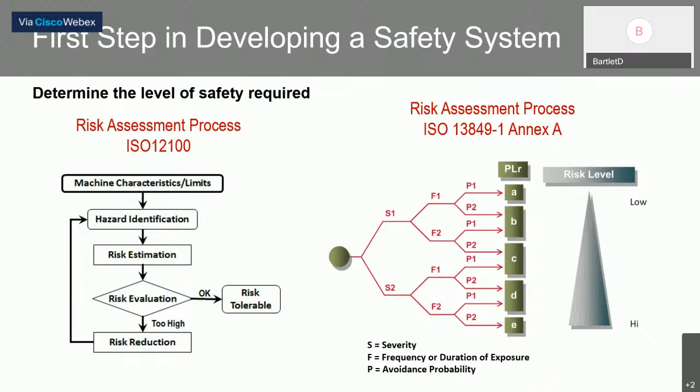In going through a safety project, Rockwell has an excellent resource called the SafeBook 5. It's available from Rockwell's website on the literature library download site. And it goes through everything from risk assessments, standards, system design, and so forth. It's an excellent resource. So if you don't already know about that and looked at it, I encourage you to do that.

All right, CIP Safety. Number one, what is CIP Safety? The main point I want to make here is CIP Safety is not a Rockwell Automation standard. A lot of people think it is. It's actually an ODVA standard. It's based on the ODVA standard of Common Industrial Protocol, or CIP. And it really just adds functional safety for EtherNet/IP and DeviceNet networks.

The standard covers how devices communicate to each other, from I/O to light curtains, safety PLCs, and so forth. An important point is it allows for the mixture of safe and regular devices on the same network, which I think is a real advantage in CIP Safety. And another important point, safety is handled in the end devices. So that really allows network media independence.

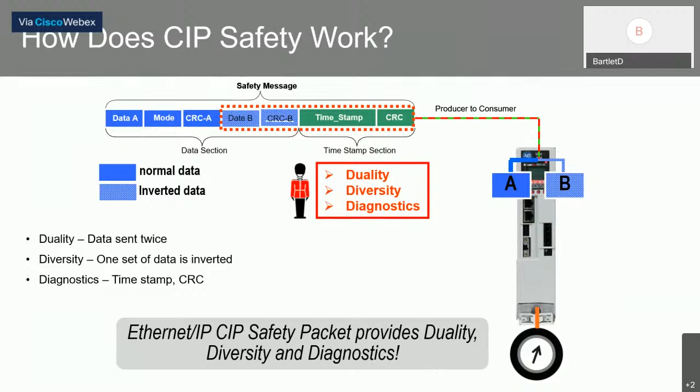Now, as we send this message, see the animation here. We'll send the packet to the drive. The drive also has to have duality, diversity, and diagnostics. So you can see here, there'll be two safety processors in the drive, which gives us duality, and one will get the normal data and one will get the inverted data. So that gives us the diversity. Of course, the drive as well has diagnostics as far as timestamp and CRC.

So in the drive, each processor looks at its data, the normal data or inverted data, and makes a decision whether safe torque off, if that's what we're dealing with, is enabled or not. If the two processors in the drive agree, then it executes the command. In this case, it will be executing a safe torque off and stopping the motor. If there's any discrepancy in the two processors or processes in the drive, of course, it would go to the fail-safe condition, as well as if there's any interruption in the network.

Again, the safety is in the end devices, so the safety processor in the drive would establish a connection. If that connection is interrupted or takes too long to communicate, the system is going to go to a fail-safe or off condition in this case.

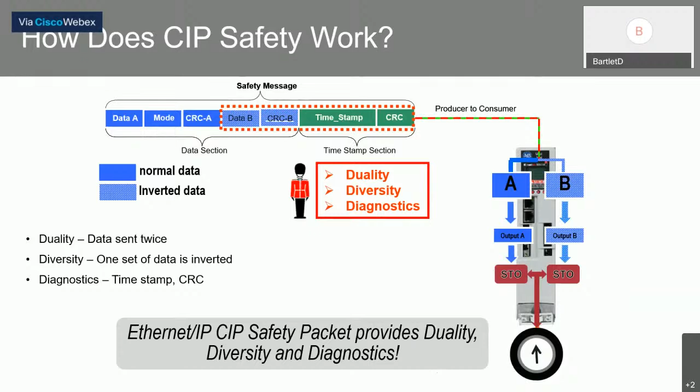All right, what are the advantages of CIP Safety? To me, the biggest advantage of CIP Safety is that we can a lot of times achieve higher levels of safety that are just not available or difficult to implement in hardwired solutions, or even other network solutions. A lot of times we can get up to a SIL 3, PLe level. And again, sometimes we can't do that with other systems. A lot of drives, we can only get to a PLd or category 3 level through safe torque off boards and so forth. This is something that allows us to extend that.

Of course, it's obvious we get a reduction in wiring. Also, for those of you that have to validate your code, we can develop code that we have validated and reuse that code, so we don't have to go through that validation process a lot.

Certainly, this puts everything into Studio 5000. We're doing motion control within that. We're doing regular machine automation with that. Now we can do safety within that. So we don't have to have separate programming software and separate processors to do everything. We've got some modularity in terms of design and safety zoning. And it's a lot easier to do troubleshooting. We don't have to run extra contacts back to I/O modules to see which devices are triggered and so forth.

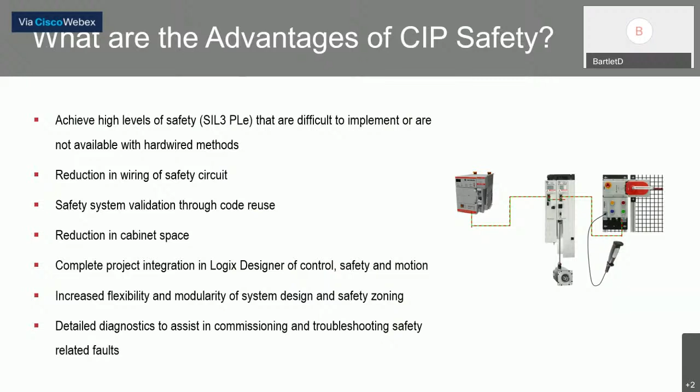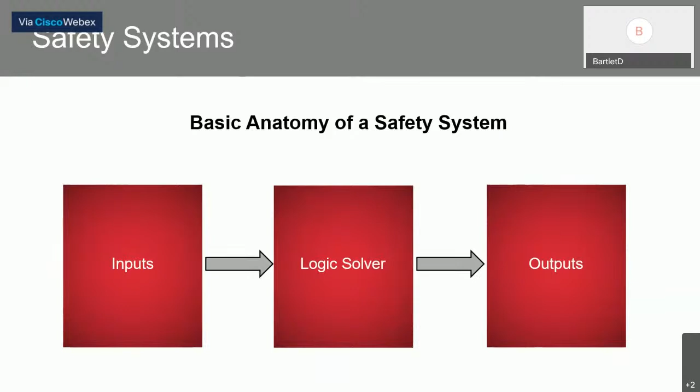So there are a lot of advantages here. Okay, in terms of the products that we offer and the systems that we have, this presentation, we're basically going to do that in 3 parts here. With any safety system or with any automation system, obviously you have a logic solver that takes inputs and then writes to outputs. So that's the order in which we're going to present information that we have today.

So we'll begin with input devices. Now, one thing I want to mention is this is not an exhaustive list of all Rockwell safety input and output devices. We have chosen to specialize in EtherNet/IP devices where you can get information into and out of your safety tasks directly. So certainly these are not the only safety devices that we have.

The first input device that we want to present to you is the multifunctional access box. We refer to it as MABE for short. It's basically a gate switch. It's for allowing full body access to a system. You can see on there, it's a gate switch, it's a handle, it's a locking mechanism. We do have integrated e-stop, as you can see. The controls in terms of push buttons and pilot lights and so forth are configurable. We have many different options for you.

We have the option of connecting an enabling switch directly into that. It is powered by 24 volts, and of course we have dual port Ethernet. The thing we like to say about this device is basically you take 24 volts and an Ethernet cable to it and you're ready to go. You got a complete safety system.

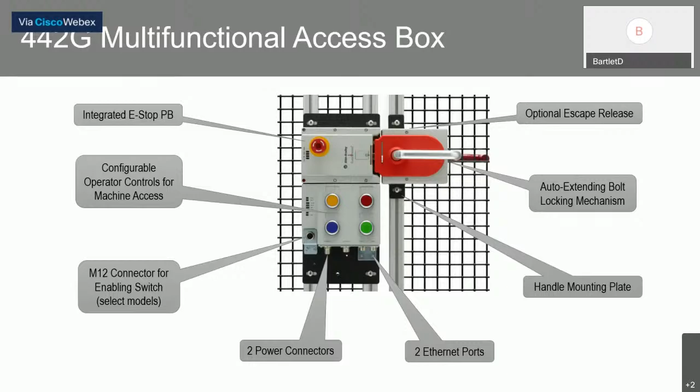All right, some more bullets about the MABE. High holding force, misalignment tolerances. It does have the escape release. It is rated for up to PLe category 4. So very, very high rating, as high as you can get in terms of safety on this. As I mentioned, we have our choice of controls. We can configure the different status lights and push buttons on it. We do have left or right hand opening, sliding or hinged doors.

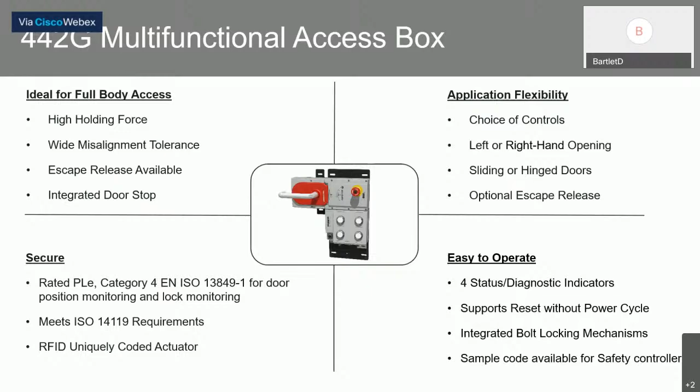And another big thing is Rockwell has sample code available for this MABE. You can go to the Rockwell website, sample code site, download the code and put it directly into your Logix processor. It's pretty quick and effective.

A relatively new device that we have in terms of the safety inputs is our CIP Safety encoder. This has, I think, only been out a few months now. It does allow you to take advantage of drive safety functions within Studio 5000. It is SIL3 PLe capable. Of course, it is Ethernet ready, just like the MABE. You take 24 volts and an Ethernet cable to it and it's ready. And the encoder data is available directly into the safety task.

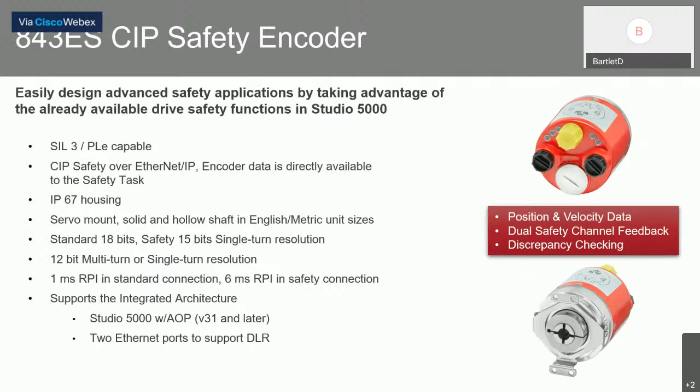You can see on the right some of the information we can get into the safety task: position and velocity data. We got dual channel feedback and discrepancy checking. So as you'll see later, we have safety functions embedded in some of our drive products and the feedback within those drives. This is a way to add that safety feedback on something that does not offer that feature.

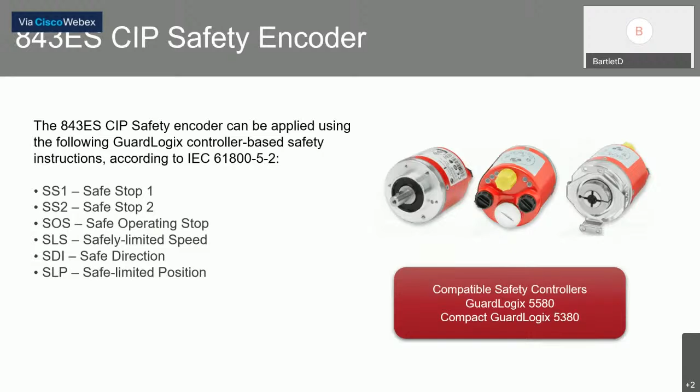And I just wanted to mention here, this is something that Gary will talk about a little later. The CIP Safety encoder allows you to get information back into the PLC for the safe speed and safe stop instructions in the PLC. Of course, all the safe limited speed and safe stop instructions are something that are in our L8 controllers, our GuardLogix 5580 and Compact GuardLogix 5380.

All right, next input device is our 450L light curtains. I do want to mention that this product hasn't quite been released. We do expect it at least by the end of this year. It is a product that's very close at this point. And really, as far as I know, the only safety light curtain that will go on EtherNet/IP. It is capable of SIL3 PLe.

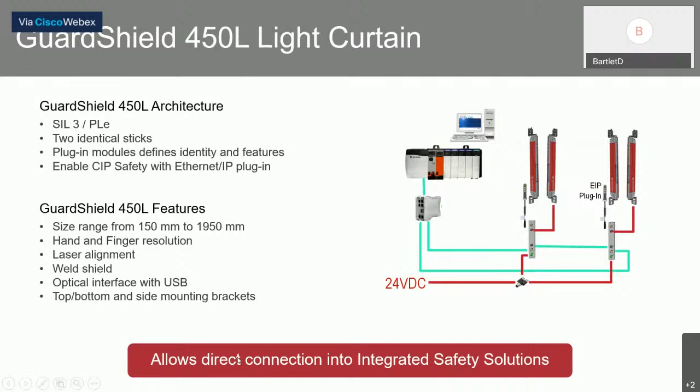The cool thing about this light curtain is we have two identical sticks, and the plug-in modules define the identity and features of the module. So as you can see from the graphic there, we'd simply choose an EtherNet/IP plug-in. I won't read it to you, but you see some of the features, size ranges, and so forth of the light curtain there. Laser alignment, hand and finger resolution, and so forth. And again, this is going to connect directly into our safety task and provide the information.

A little bit closer look at the light curtain. We have an EtherNet/IP plug-in module that's going to go into the light curtain. And then we have a block that I can plug at least as many as 2 light curtains into. So it's a completely modular system.

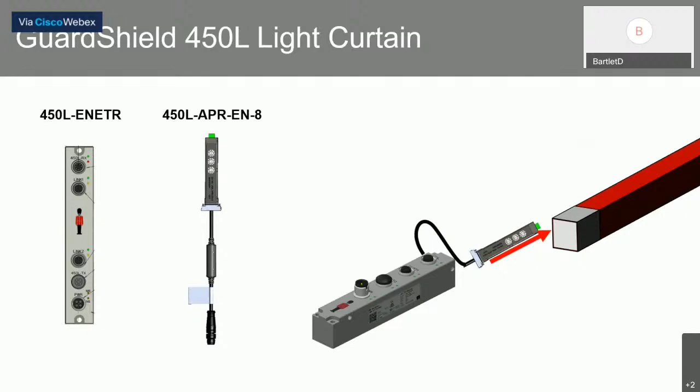Our last input device is the SafeZone 3 CIP Safety laser scanner. This is kind of a look into the future because this device does not have a release date yet, but it is something that's coming, and we wanted to make you aware of it. At this point, this will be up to a PLd capable. It will integrate directly into the safety task.

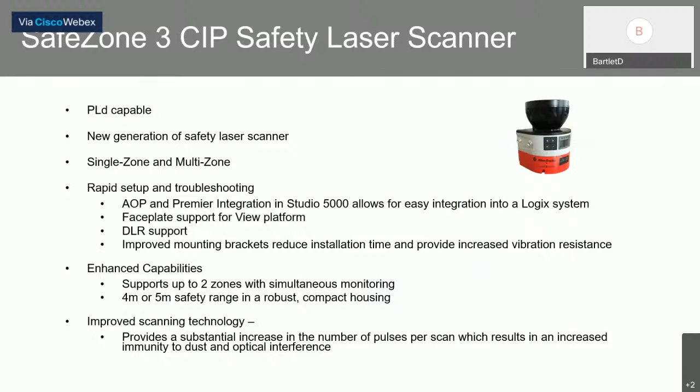We have the AOP and premier integration into Logix. So like any other EtherNet/IP device, when you add it to the I/O configuration tree, all your tags and everything are immediately created for you. So that's all of our newer CIP Safety EtherNet/IP devices. We'll go into the logic solvers, the controllers, right now. Probably most of you watching this are already familiar with most of our PLCs, so I don't know that this will be anything new.

So if we begin with our Compact GuardLogix processors, our 5370 and our 5380, also known as the L7 and L8 controllers. The GuardLogix 5370 has been out for a little while. Of course, it supports motion and safety as well, up to 16 axes. It is a SIL 3 PLe controller only. And when you purchase the safety controller, you also have to purchase the motion as well. And of course, it has 100 meg Ethernet embedded.

The 5380. Most of you are probably familiar with the differences in regular 5370s and 5380s. You certainly can do motion on this, a higher axis count with the 5380. We do have a gig port in terms of Ethernet, so that's exciting. Cool thing about the 5380 is with the dual port Ethernet, they can be the same IP address, or you can split the IP addresses apart and have two different subnets.

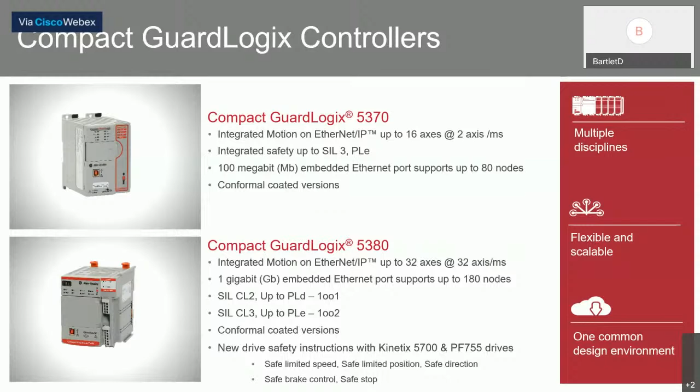All right, going on to the GuardLogix controller, kind of the same story. We had 5570s and 5580s. All of you know that with the 5570, we can go to a safety processor, but we always have to include the safety partner, and that's rated to a SIL 3 PLe version. Like the Compact GuardLogix, when we go to the GuardLogix 5580, if we only need a PLd, we can just have the safety processor by itself, or we can change that to a PLe application by adding the safety partner.

And in terms of Studio 5000, it's really just a checkbox to go back and forth between them. So if you had a PLd and you wanted to make it a PLe, you can go into a checkbox in your program, add the safety partner, and now you have a PLe application. And of course, the other things that come with the L8 processors: the safe limited speed and safe stop instructions, as well as the gigabit Ethernet.

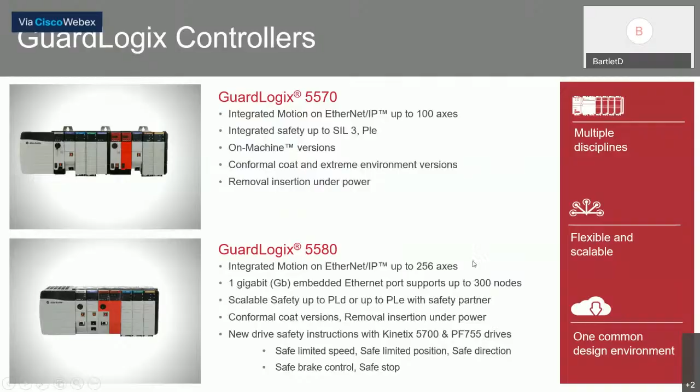All right, a little bit of CIP Safety I/O. This is debatable whether this is an EtherNet/IP product. All the distributed I/O can go on EtherNet/IP, so I just put something quickly in here. Just wanted to make sure that you are aware of some of our newer safety I/O products. We have the POINT Guard safety I/O, which has been our bread and butter for a number of years now, and still is. We have the ArmorBlock safety I/O, which we've had for a while. But in the last year, Rockwell has added some other I/O platforms.

Number one, we have 1756 I/O that can be in the local chassis of a processor now. It also can be in a remote chassis if you have a 1756 remote chassis. We have Compact safety I/O now. Similarly, it can be local I/O for a 5380 controller, or if I put an Ethernet adapter here, this can be distributed I/O. I jump down to the FLEX 5000 I/O, same thing there. We have several safety modules in that now. Of course, FLEX 5000 is always a distributed I/O.

One thing to mention about the Flex 5000 as well as the Compact 5000 is they are a gigabit Ethernet platform. So if I put Ethernet adapters in here, that has to be connected to, say, a 5580 or 5380 processor that has a gigabit port.

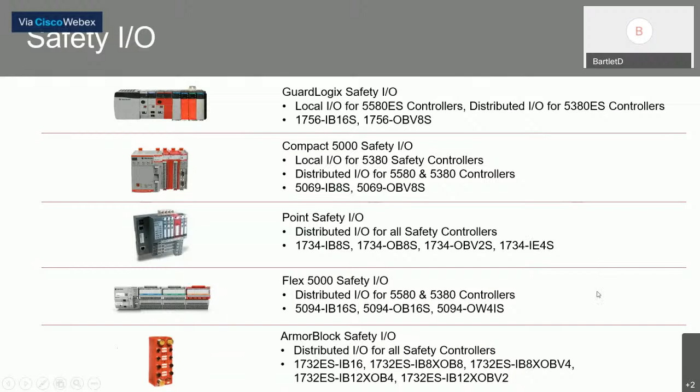Whereas, on the 100 meg scale, we still have the Point Safety IO here. And you can see some of the things we have. Typically, we have an input-output module for each of these. Some of these we have bipolar relays. There is one exception where we have an analog input or pulse input in the Point IO. So different things there.

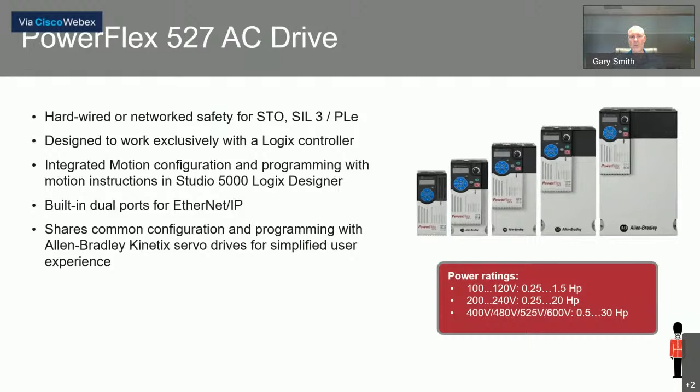Hi, Gary. I think we might have lost you. It looks like you're muted. How's that? That's much better. All right, sorry about that.

No problem. So I was stating that the 755 and 755T are by far our most flexible product line, either in the drive or motion platform. We are able to run permanent magnet or induction motors. The 755 can operate in a standalone mode, or it can reside on multiple different communication networks, and it can also operate very similarly to our Kinetix motion products as well. It's available from fractional up to 6,000 horsepower in a low voltage platform.

From the safety perspective, though, the 755 supports multiple different safety cards, and these cards allow you to achieve different safety functions. So you can achieve hardwired or network safe torque off, all the way up to and including advanced safety features that Donnie had hinted at earlier. And these include safe stops, safe limited speed, safe position, etc. And you can achieve up to performance level E depending on the required function.

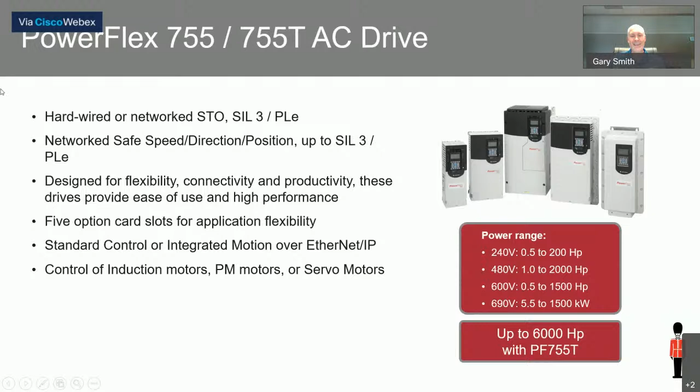The Kinetix 5500 is a Kinetix servo product. It can operate as a standalone drive or a multi-axis drive. And in multi-axis mode, we utilize a shared common AC and/or DC bus configuration. The 5500 is available up to 15 kilowatts and can operate our newer single cable VPx motor design. There are two separate versions of the Kinetix 5500. One version is dedicated to hardwired safe torque off. The other version supports network safe torque off up to performance level E.

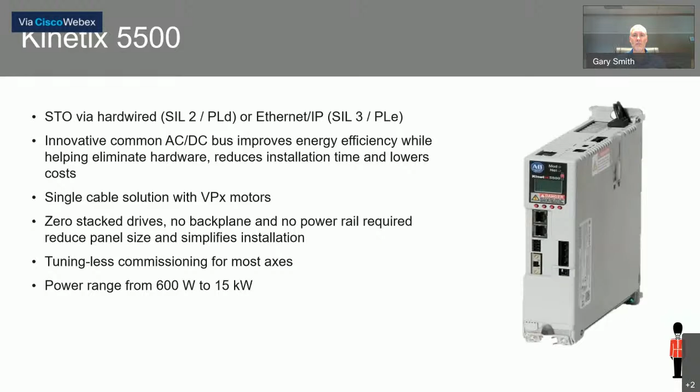The Kinetix 5700 is our high-powered servo offering, available up to 112 kilowatts. It can support permanent magnet motors or induction motors. But the key to this product line is it's optimized for multi-axis control. So you will see that there are single axis amplifiers as well as dual axis amplifiers, and they can all be connected together via a common DC bus configuration.

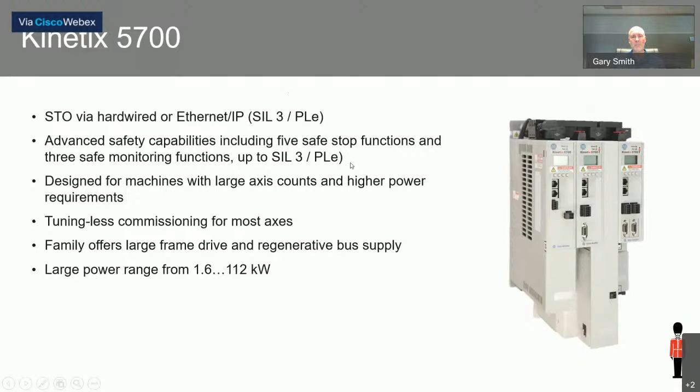The 5700 is also available in two distinct models. One supports either network or hardwired safe torque off only. The other version supports the advanced safety features. So again, like the 755, we can do safe limited speed, safe position, safe direction. And what allows us to do that are the new safety instructions that are available in the L8-based GuardLogix processors that Donnie had mentioned. So we can do some of these advanced safety features, and I'm going to cover a few of them here.

First off is safe torque off, and this is one of the more important instructions. And the reason is this is what is going to completely disable the servo drive output. This prevents the transistors from firing and prevents the motor from developing torque. So the motor essentially will freewheel and cannot develop torque. You will note that I'll reference several times the safe state in your servo system. This is essentially what we're talking about in the safe state, where we cannot generate torque on the motor.

Safe stop 1 is essentially a controlled stop or a category 1 stop, where we're going to not allow the motor to coast. Instead, we're going to command it to 0 speed. Once we achieve 0 speed, we will then transition to a safe torque off mode with no additional control over that motor. We also monitor the deceleration ramp to make sure that we are decelerating appropriately.

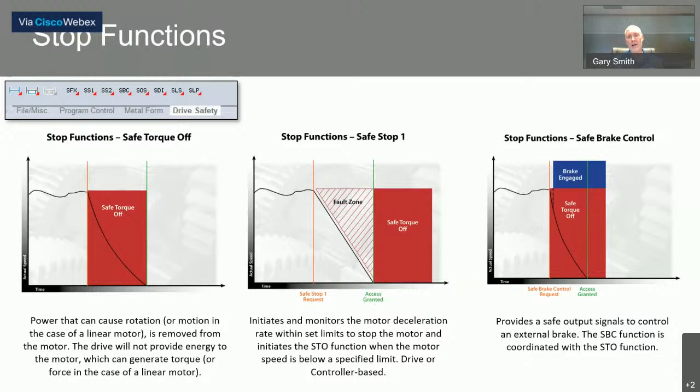Safe brake control is a direct control of an external auxiliary safety rated brake. We also synchronize the safe torque off functionality of the drive with the brake control.

Safe stop 2 functions similarly to Safe Stop 1, where it is a controlled stop. However, when we get to 0 speed, we are not going to initiate a safe torque off. Instead, we're going to automatically transition to a safe operating stop mode. So at this point, we're going to monitor for either position or speed while the motor is stopped and making sure there is no deviation.

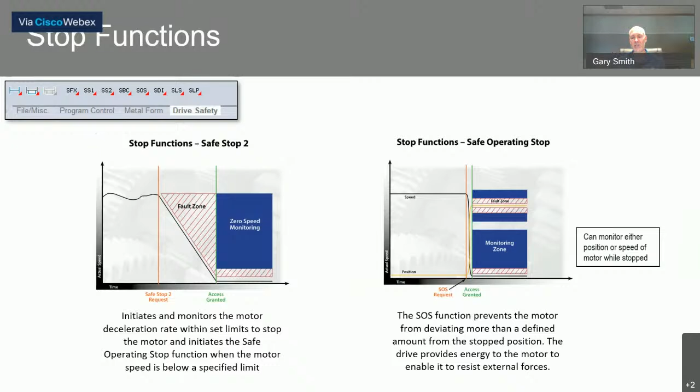Monitoring functions are very important, and the thing to note here is that they are exclusively monitors. Monitor functions reside in your safety task, and they have no responsibility for actually commanding your drives and motors to the desired condition. So in our first example, we have a safe limited speed function. So there will be a maximum speed assigned to safe limited speed. And once the drive is within that window and we are monitoring at that point, if we ever exceed that maximum velocity, the drive will be forced to the safe state. As previously mentioned, that's safe torque off.

We can also do safe direction, where we have an intended direction of the motor. If we ever detect motion in the opposite direction, we will immediately force the drive into the safe state. Safe limited position is going to set up a tolerable window of positions for the axis. If we ever move beyond that allowable window, again, we are going to command the safe state.

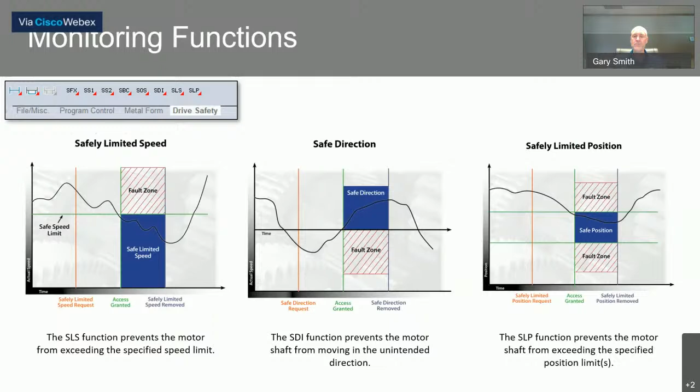So how do we do this? I briefly mentioned the safety task programming, and there's a standard task inside the controller. Well, the safety task is where we're doing the monitoring. The standard task is where we're actually doing the commands to the drive, and this is where you normally have your move instructions, jog instructions, etc. So in this example, we are going to have a demand for a safety function for safe limited speed, and we're going to get an output from that instruction.

This is where we're actually going to command that lower velocity, a velocity less than the threshold of the safe limited speed monitoring function. The SLS instruction has a check delay time to give the system time to achieve the desired velocity. But once that timer expires, we will begin monitoring, and if we ever exceed that maximum speed, we will transition to the safe state.

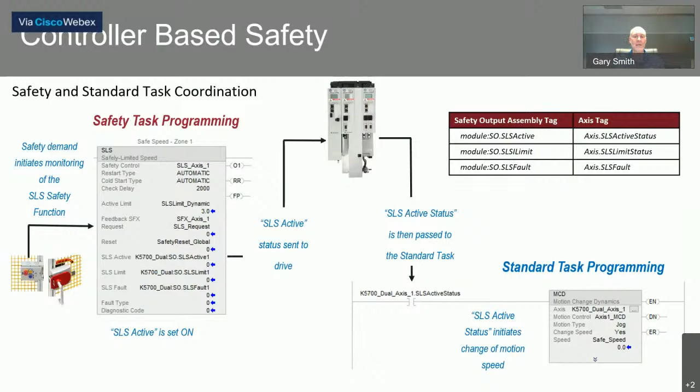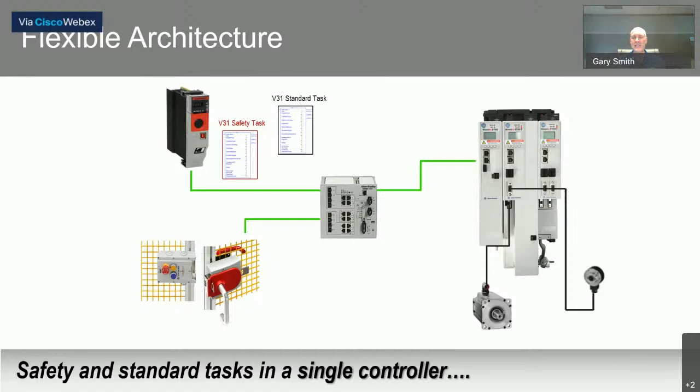So CIP Safety examples: there are quite a few different ways you can configure these safety systems, and depending on how they're configured, you can achieve higher or lower levels of safety. In this first example, we're simply showing a Kinetix 5700 drive with a GuardLogix processor. Within that GuardLogix processor, we're supporting two different tasks, the safety task and the standard task. This is a very common way of achieving advanced safety on these drives. However, you do not have to architect it this way.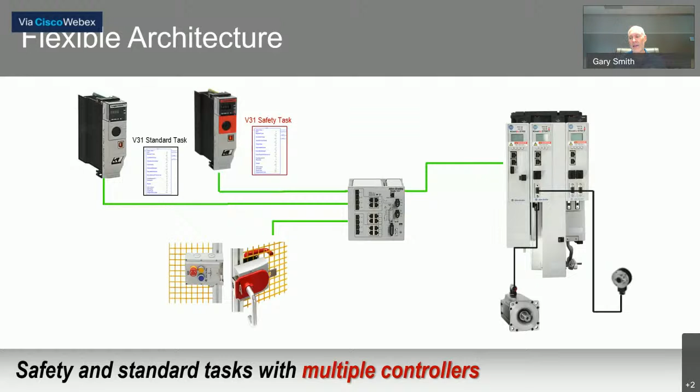If you choose to, you can have a standard processor that handles all the motion control, the standard task motions. You can have a completely separate GuardLogix processor running a safety task that handles the safety. And how we accomplish this is within each of those processors in the I/O configuration, you are going to include that Kinetix 5700 drive. However, for the standard processor, you're going to set that axis up as motion only. And in the GuardLogix processor, you will set that axis up as safety only, and we're able to handle both functions.

Here's another example of how you might be able to utilize our wide array of products to achieve a lesser cost system that still achieves a high level of safety. For example, a safe limited speed monitoring solution. In this case, we show a PowerFlex 527 drive that resides on network safe torque off. However, that drive does not support safe limited speed, safe direction, etc. However, we can add an 843ES safety encoder to provide those types of functions. And in that case, we're able to achieve the same level of safety, but possibly at a lower price point.

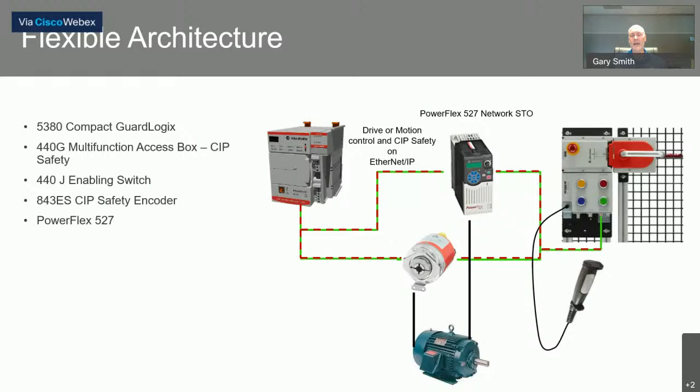So here is an example or a scenario where we want to do speed monitoring in our GuardLogix processor. And let's say that based on your risk assessment, you know you only require performance level D. Well, your hardware configuration may look like this, where we have a Compact GuardLogix SIL2 version or a GuardLogix L8 standalone processor. We would utilize that 5700 with the ERS4 version and one of two motor options on the output, either a SIL2 rated encoder that's part of our VP series motors, or our older generation MP motors that support sine and cosine feedback.

However, let's say that you required PLe capabilities in that same system. The first thing you would have to do is upgrade the processor. So you're going to transition to the SIL3 Compact GuardLogix, or you can add the safety partner to your L8 processor. Same drive, and now you would have the same VP motor with SIL2 encoder, but you would have to add a secondary encoder. In this example, a sine cosine.

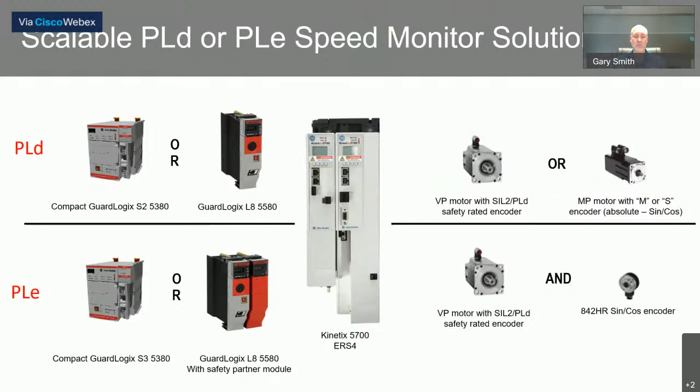What if we wanted to do this with a PowerFlex 755 drive? Well, we would utilize the S4 safety card. For PLd, you would start out with one of those same two processors, either the SIL2 Compact or the standalone L8. You'd also have to have a motor with either quadrature encoder or sine cosine feedback with the appropriate feedback card.

For PLe, you're going to require the same processor upgrade to the SIL3 version or the safety partner, and you're also going to have to utilize that second feedback device. So either two quadrature encoders or a sine cosine and quadrature encoder. And in these scenarios that we're talking here, we are usually referring to safety rated encoders.

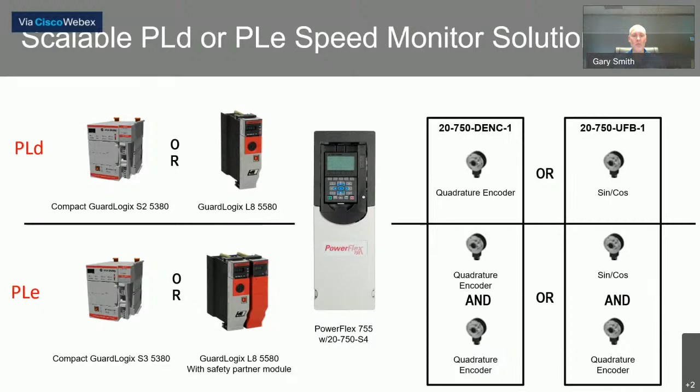So to aid in the development of some of these safety applications, especially with the advanced safety functionality, Rockwell has come out with a few safety application techniques, and there are more on the way. One that exists today is based on safe limited speed, and it uses either the Kinetix 5700 or the 755 with the S4 card. And as I mentioned, that's available today.

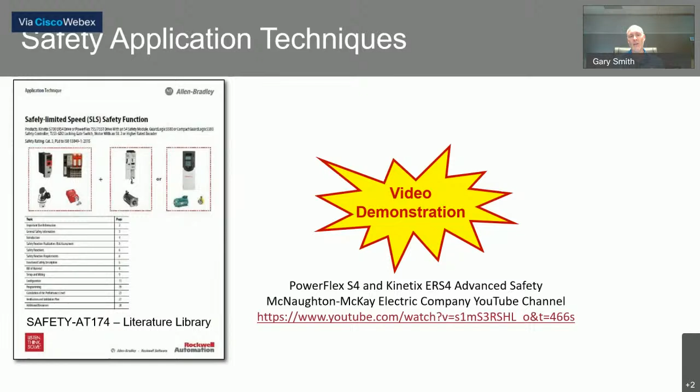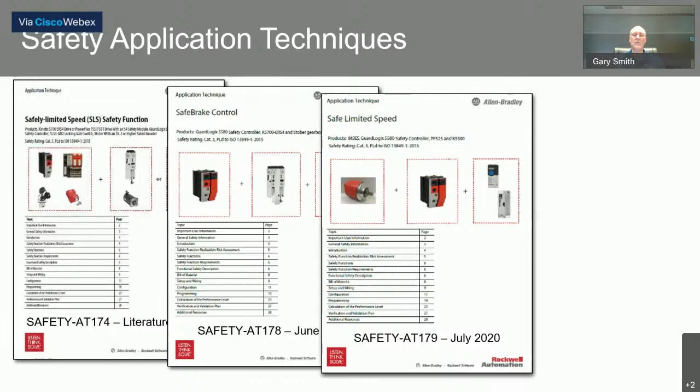There is an existing safe brake control document today that is centered on the 755, but there's a new one coming out later this month that focuses on the 5700. There will be a safe limited speed document coming out that's based on the 843ES safety encoder that we've referenced several times. And there will even be a safe limited position document, all available later this year.

In addition to those application technique documents, there is a lot of information available online to discuss these functions, both the functions and the individual products that we have reviewed. You can always go to ab.rockwellautomation.com, go to the products tab, and from any of the products that you have an interest in, there's usually a documentation tab where a lot more information is also available to you.